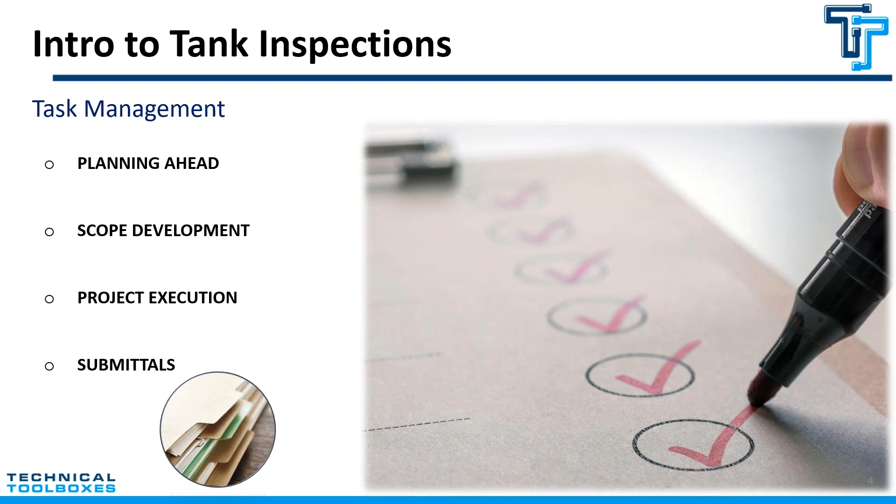Now, starting with pre-job preparation, the first thing I like to go over is communication, building a good line of communication. Project identification, knowing the type of tank and inspection that's going to be required. Information assembly, gathering your static data and historical documents. And equipment and manpower, outfitting each project with the proper tools and personnel to complete the project.

Okay, communication. One of the biggest things in this industry, as most of you know, is building relationships. Having a good line of communication, streamlining a good line of communication with your client or your customer during these projects is vital. If you run into a problem midway through a project, it's really important that you're constantly keeping your client up to date with something that might have gone wrong or something that might be going well.

They really want to be on your tail as much as possible because they want to get these tanks back into service as soon as they can. Knowing who your primary contact is, and also if there's any safety concerns, maybe there's some obstructions that you need to know about, and how fast do they want to get this job done. Obviously, you want to do these projects with good quality, but you do want to manage your expectations at the end of the day.

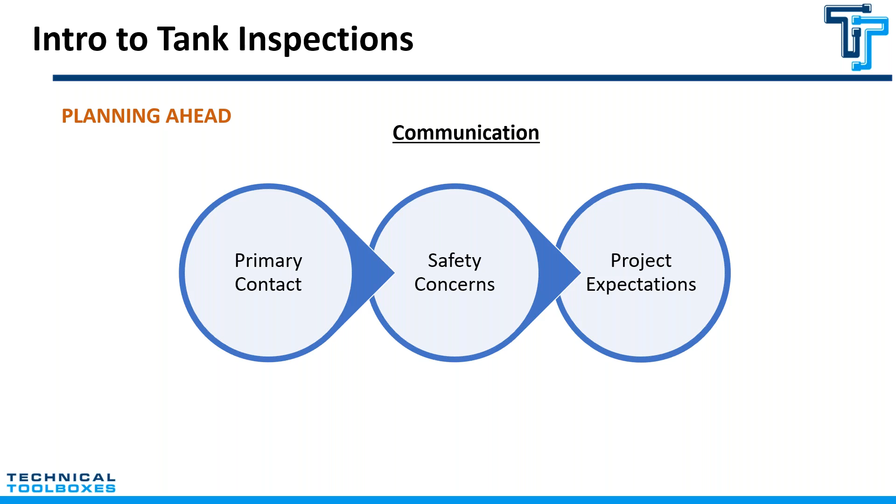Project identification. Obviously, you need to know what type of tank you're going to be inspecting, whether it's a vertical, horizontal tank, whether it's elevated or underground. These are really important features that you really have to acknowledge, especially when building your scope of work. The type of tank also changes the components that you will be looking at and evaluating during your inspection.

Inspection type, same thing. Knowing whether it's an internal out-of-service inspection or external in-service inspection. This changes obviously due to your interval of inspection, and this is something that the client will communicate with you before the job commences.

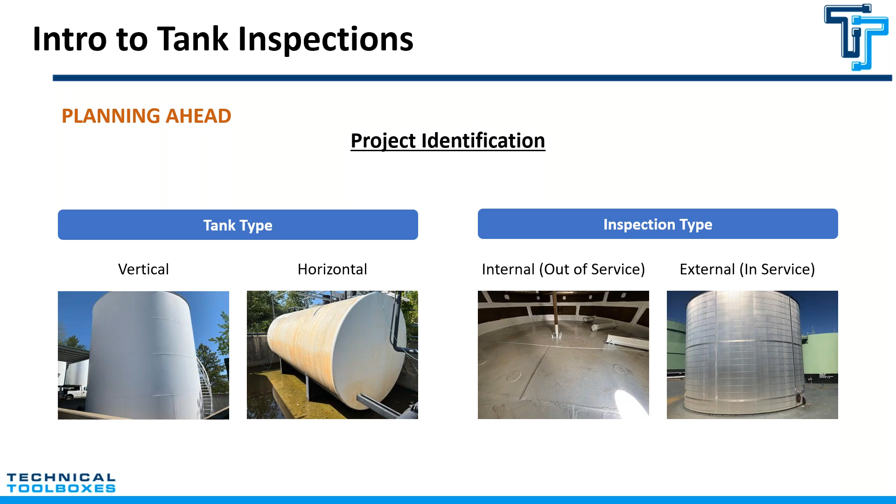Now, again, knowing whether it's an internal or external inspection is going to change which components you are inspecting. Obviously, you're going to want to look at as many things as you can while you're doing these inspections, but you will have limitations even on an out of service inspection. There's always going to be limitations. There's always going to be things that you can't inspect or evaluate. So having a good mindset on that is really important going forward.

Information assembly. Now, again, this goes along with communicating with your client. You really want to get as much information on these units as you can before you jump into them or before you start your project. Gathering as many historical documents, drawings, and previous inspection reports. These are going to help you build your report at the end.

It will also help you know if there's anything that you should keep an eye on while you're doing the inspection. Maybe there's a recommendation from a previous report where you need to monitor a certain area for deterioration. Again, things you have to be aware of before the inspection.

And it's also important while you're communicating this with your client to establish if he or she may know if there are any pre-existing problems. They're going to help you, and having that good line of communication is really going to help you solve a lot of problems preemptively during your inspection.

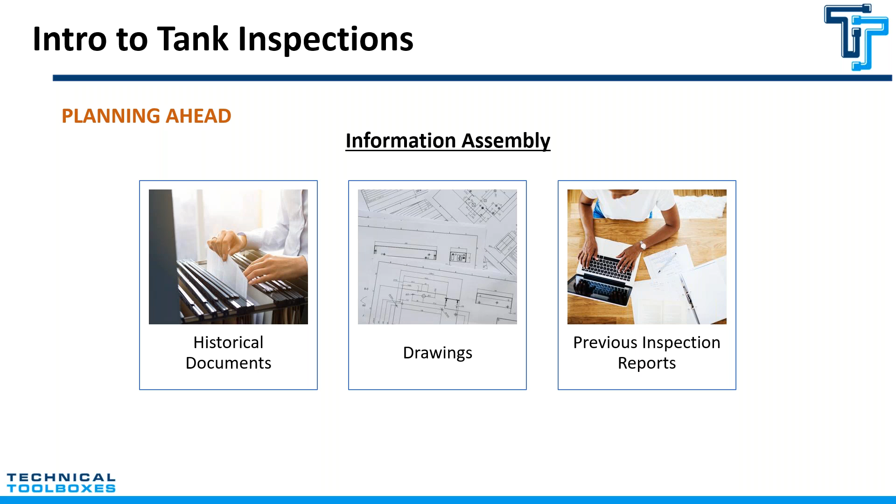Equipment and tools, right? Making sure you have the right tools. Obviously, it's going to change based on what you're doing in your inspection. I tend to like to overpack my units with as many tools and consumables as I possibly can, in case of a fire, as the expression goes. In case something goes wrong, I want to make sure that I have everything.

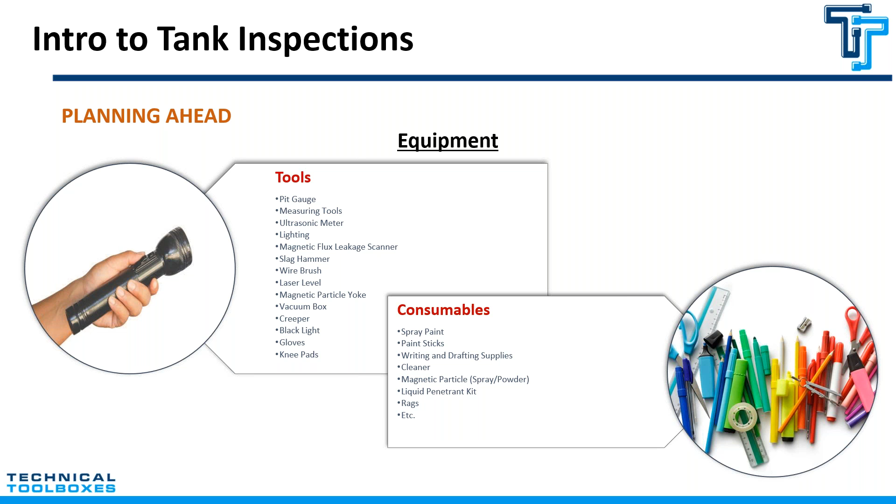I've given a list of some of my most common tools that I would pack my truck up with before heading out on a job. But again, it will change and vary based on your inspection type and your location. Obviously, if you're flying, you can't bring a lot of these things with you. So making sure that you have a good understanding of what you cannot bring is important. Whether it's going to all fit into your vehicle also plays a big factor.

The next thing we're going to talk about is manpower, team building. To me, this is one of the most important aspects of an inspection. Surrounding yourself with the right people is always an important task when it comes to any business, when it comes to any team. You need to make sure that they're experienced, they're qualified, certified, and well trained.

Just because you may be qualified for something doesn't mean that you are certified. There's a big distinction between those two things. You are going to be required to do certain inspections and certain tests that you will have to be certified for and qualified for. So making sure that your team is built upon those bricks will make it easier at the end of the day for you. Obviously, the experience is really important, and being well trained. And honestly, at the end of the day, just making sure you have the right people surrounding you always makes the difference.

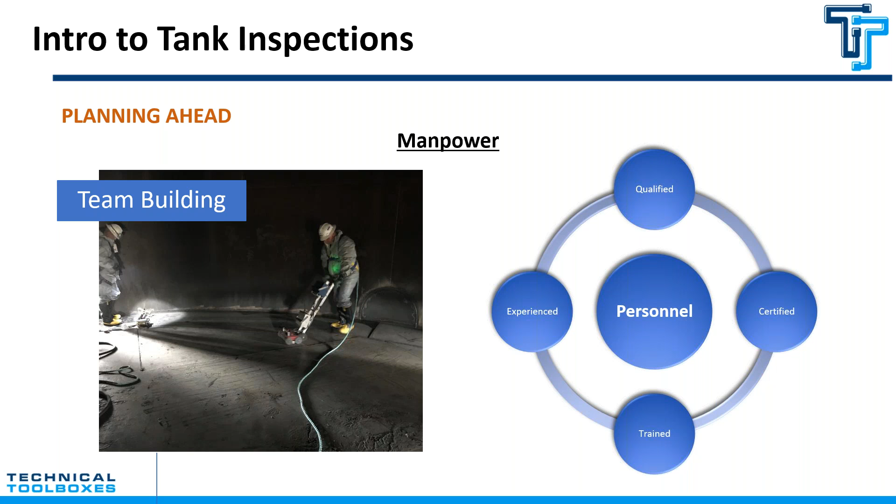Now, building your scope of work. For this case, we're going to talk about building a scope of work for an internal out of service inspection, which is, again, entering the tank and doing a full inspection on every component.

Component identification: identifying the components of the tank requiring inspection, right? This is knowing exactly the major components that you're going to be looking at. Each component will have different types of evaluations that will need to be performed for each one. The bottom and the floor, the shell, the appurtenances or manways and nozzles, any attachments to the tank, the roof, containment, and then miscellaneous. And I like to always include miscellaneous in there as a caveat in case something else comes up.

And this could include specifically the coating of the tank or maybe the cathodic protection, the access ways, the stairs. And honestly, these days, people are paying much closer attention to safety measures than they have been in previous years, which is great. So paying close attention to access ways, stairs, platforms, stuff like that is going to be important moving forward. You always want to be looking close at these things.

And if you do find something, it tends to be a positive and you end up saving the day for a lot of people. If someone were to come along on your job and not only get hurt or just notice a corroded stairway, it could cause issues for yourself and for your company. So I like to put a little emphasis on those areas when I'm doing my inspections.

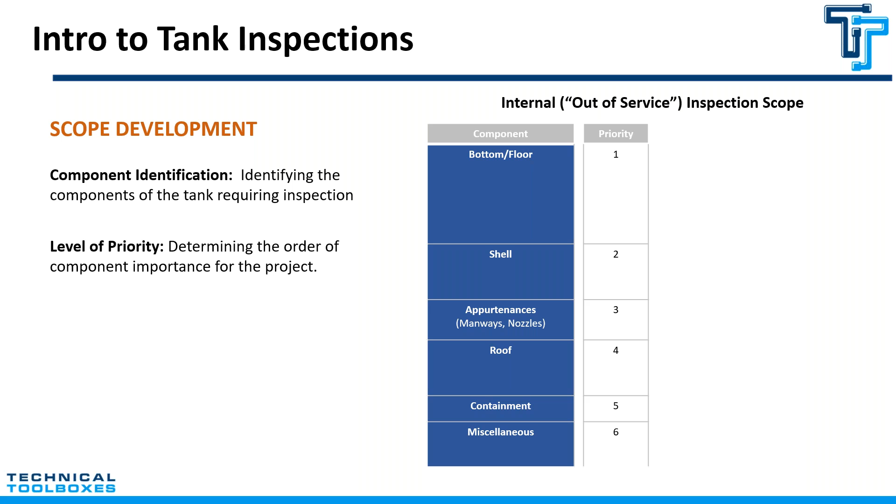Procedures. Now this is again, we're breaking down the procedures for each component, assigning the appropriate tasks, right? Every single component has a different type of procedure. And one of the biggest issues that I have found in this industry is that inspectors, even though they may have the certification, often don't have the experience. And so knowing what type of evaluations they need to perform is obviously very important. I always say that you can teach anybody how to do anything. It's a matter of giving them a list. It's putting a checklist together.

For the bottom and floor, for example, I like to make sure that you're doing a good visual inspection of all the plates, the welds, etc. Really, really taking a good look. The bottom and the floor tends to be the area where you're going to see the most deficiencies, the most deterioration. This is just a common thing. Going to the shell, right? Visual examination of the shell, same thing. Those lower sections of the shell are going to be really important to focus on.

And also, knowing which product the tank is in is also really important. So if this tank is experiencing product with a lower specific gravity like gas, you're going to often see corrosion in the vapor space, which will be up on the upper section of the shell, right? Or the underside of the roof. So it's important to kind of know your information before moving forward. And I'll get more into that as we get going here.

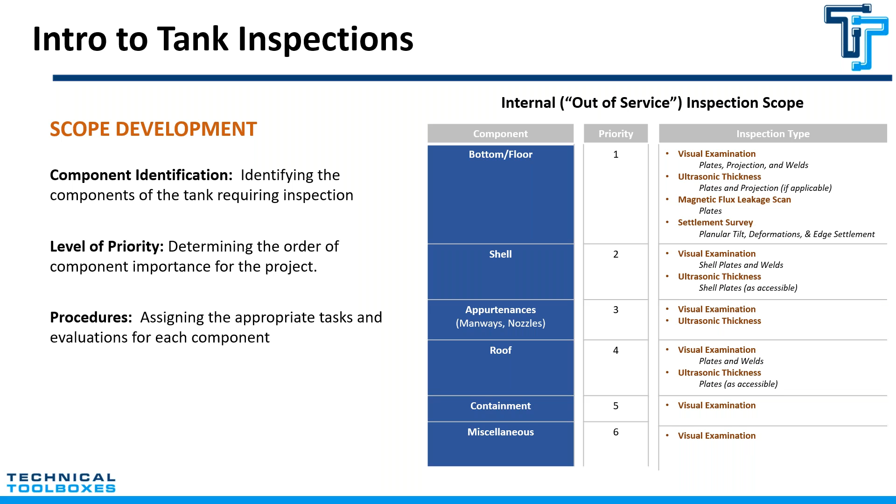Now, it is important to note that sometimes when developing a scope, your client or your customer contact may already have a scope that they want you to follow. I'd say 20% of the time this is pretty common, but most of the time they want you to develop the scope of work yourself. So knowing exactly what your components are and what types of inspections are required for each component is valuable. And again, there's plenty of people out there who have been doing this kind of stuff who will know. So there's endless resources when it comes to the type of inspections that need to be performed.

Moving on. Now, obviously, here we're talking about the actual field work, project execution, collecting the appropriate data. The more, the merrier, right? The more data you can collect, obviously, the more ground you're going to cover, the more you're going to make sure that you have at the end of the day. Capturing as much information as possible on the current condition of each component by the use of all these previously mentioned test procedures. Really, you want to just make sure, again, you're covering as much as you can, collecting that data, and then putting it into a report format. This will help your client. It will help future inspections. It will help really anybody who's going to be looking at that information in the long run.

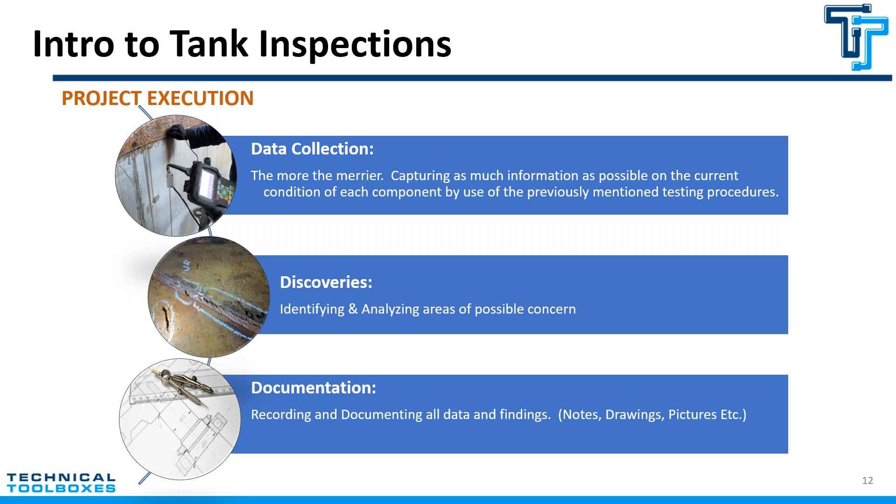Discoveries, right? This is where we're talking about our notable areas of concern, things that pop up during these inspections. This tends to be one of the most important things, obviously. You're out there looking and analyzing all your areas of concern, all your possible areas of corrosion, mechanical failure, so on and so forth. Documentation, recording and documenting all the data and findings, right? We're talking about pictures, drawings, etc.

Submittals, okay? Now we're getting into repairs and recommendations, detailing areas requiring repair, remediation, or monitoring, as well as providing the appropriate corrective action for each, right? This is usually the most important section of doing an inspection. Knowing what type of recommendations you need to present to your client and what kind of repairs each recommendation will require. Sometimes it's going to be monitoring a certain area over a long period of time, but again, having a good grasp on your recommendations and what is important for them to repair is important.

Again, I like to break everything down into a priority level. I like to say whether or not it needs to be repaired now, it can be monitored over a period of time, or it's not an area of concern. Again, noting everything is still important. I like to make sure that we're in the business of covering our behinds. We need to make sure that we're looking at every single thing and we're recording everything.

It's the old adage about even if you verbally tell your client that you have seen something, you always want to make sure that you follow up with an email or something written. I like to put it in my report later on to say, here are my recommendations. These are considerations that I have brought to the attention of my client. Again, it's all about making sure that you're covering all your bases at the end of the day.

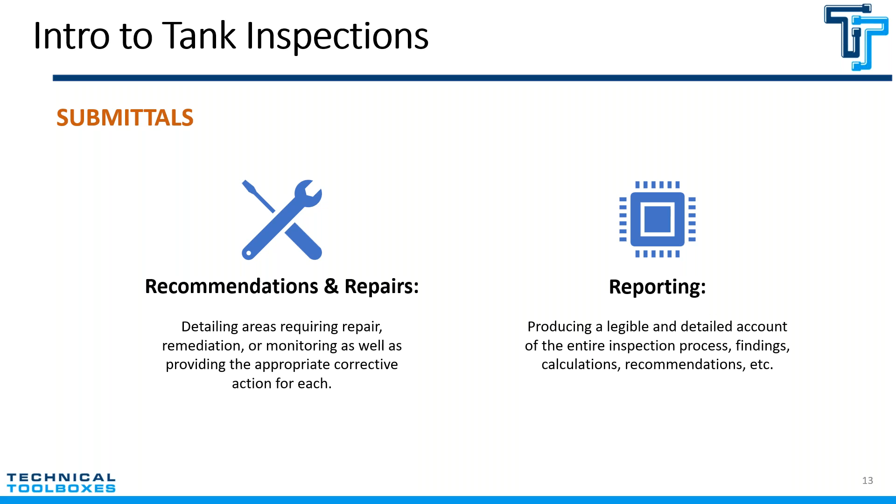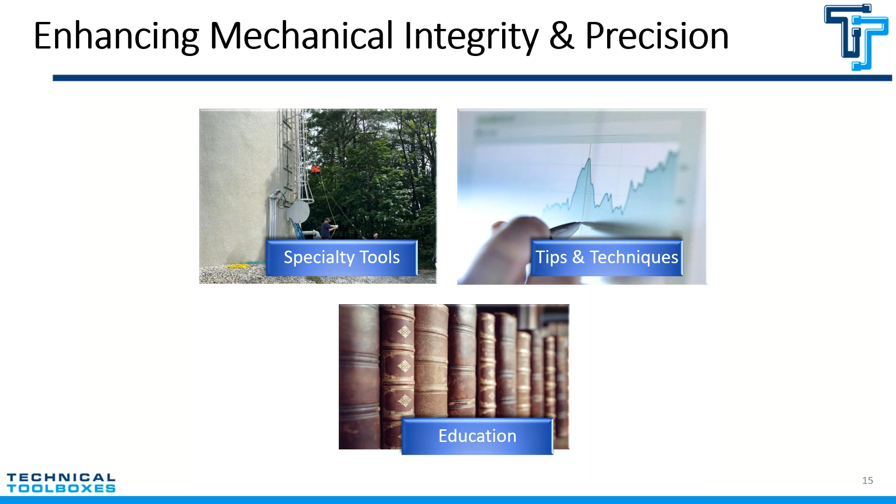All right, we're moving on to enhancing mechanical integrity and precision, right? This is where I'm going to talk about some tips and tools to performing a good solid inspection. For me, obviously, I like to break it down into tools, tips and techniques, and education. When we're talking about specialty tools, you can kind of go in multiple ways. Knowing which type of tools to use while you're doing your inspection is kind of up for grabs. Obviously, getting the more advanced technology out there is great and can be very valuable, but also making sure that you have a good grasp on the basic equipment is important too. And obviously, we're all trying to get our hands on the newest and best.

And so, using a phased array unit, honestly, this has been a new thing for me in the last few years. I found that you can find flaws on a tank bottom faster and more accurately with straight beam inspections. Phased array units are typically only used for angle beam weld inspections, but I took a class on how to do flaw detection with straight beam with phased array, and it's changed my world as far as looking for flaws on a tank bottom, tank shell, whatever it may be.

I've been able to find areas of concern that I never thought I would be able to find before, and everything is so much faster now, and honestly it's changed the game for me. So I couldn't suggest it more to any of you new inspectors or current inspectors out there: get a flaw detection straight beam inspection certification. It's totally worth it.

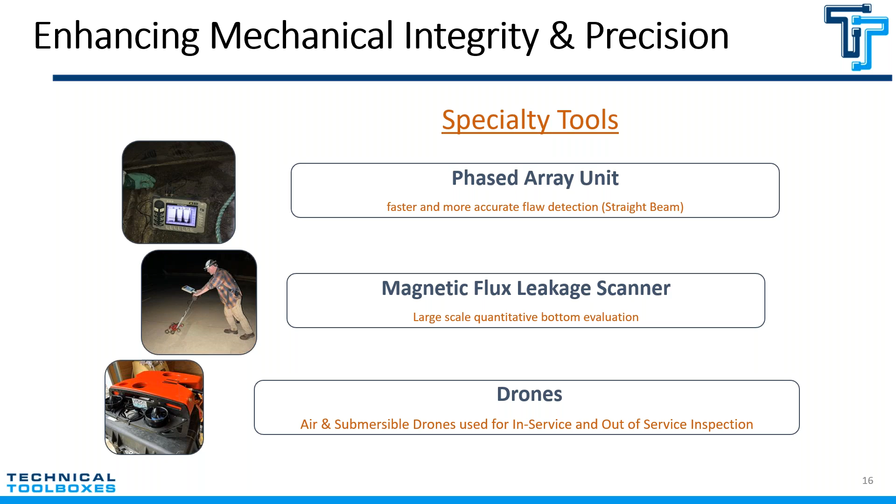Again, I still am more privy to doing an inspection when I'm hands-on, but again, new tools, new opportunities. It's great to keep going in a forward direction. Probably going to take all of our jobs one day. Hopefully not.

Tips and techniques. Again, I'm going to go through some tips and techniques for you. Doing mapping, which is just rollout drawings, is super important during your inspections. I like to do them no matter what, even if they're useless, even if I'm not providing myself with anything. Honestly, I'm just sketching out what I'm seeing and making sure that I'm covering everything.

And when you're asked to do repair plans at the end of a project, it's super helpful to a welder or a welding crew if they need to go find something and you've mapped it out completely. Very beneficial. And again, just being able to have that in your own notes and your reports can be a super valuable tool.

Data collection. Yeah, sorry, data collection. And this is in regards to Technical Toolboxes itself, being able to collect your data while you're in the field. Again, I like to put it all on paper. Technical Toolboxes is now finding a way to enhance that experience. They've built a program now where you can put your information while you're in the field into a collection tool and upload that into their program. This will help you do calculations and really help you with your reporting at the end of the day.

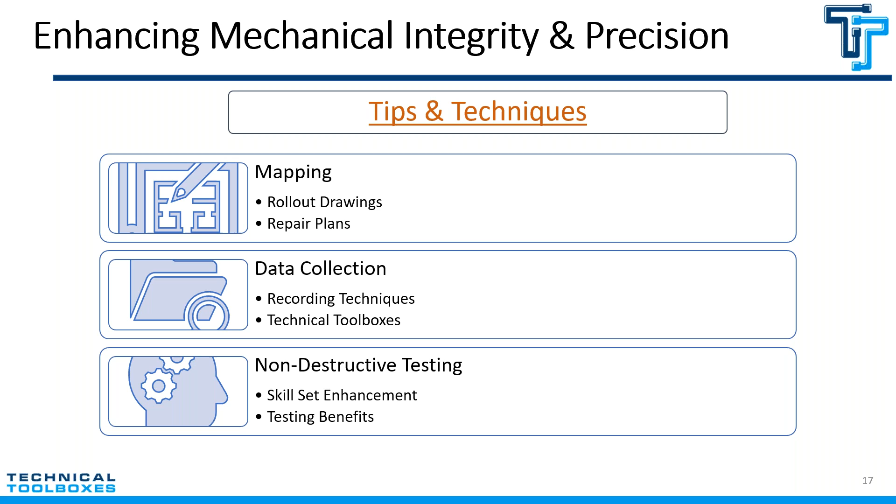Obviously, non-destructive testing, getting your NDT skills up. This is huge. I know that for me, when I started actually managing projects myself, having that NDT background was super beneficial to me. Having been in the trenches, doing every aspect of these inspections really enhanced my skills, and I'm very, very thankful for it to this day. You're also willing to do a lot of things that you normally wouldn't be willing to do, so I always enjoy that. Yeah, moving on.

And more tips and techniques here. Engineering controls, right? I use this as a way to really set yourself up for success. Recommending protective coatings. For me, over the years, I have dealt with so many units where companies are deciding that they don't want to spend the money to put protective coatings inside of their tanks. To me, it's like the best insurance policy. At the end of the day, you would be stepping over dollar bills to pick up pennies if you're not putting these protective coatings in.

Some products it's not necessary for, because those products tend to not be corrosive, but most products, especially in the oil and gas industry, are very corrosive and bad for steel. And you will be amazed at how quickly steel will start to deteriorate in a small period of time.

On many occasions, I have seen a brand new tank floor be installed and they decide not to put a protective coating, an epoxy coating, on the inside. 10 years later, they open up that tank and it is riddled with flaws. Doesn't take much. So I'm always telling people to recommend coating tank bottoms, coating the inside, do as much coating as they can, always keeping up with it. Even if it is coated in the first place, just make sure you keep up with it. Super, super beneficial. Preventative measures.

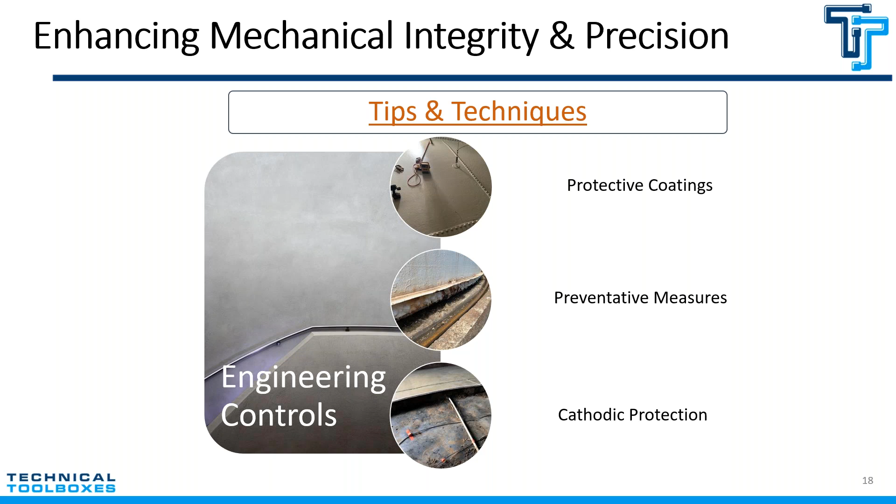Cathodic protection. It's becoming more and more popular as time goes on. There are still a lot of variables that come into play when it comes to cathodic protection. It's not a perfect science. People will tell you that it is, but it still needs work. And at the end of the day, it still is a useful tool when it's working. So again, if you have a tank that has cathodic protection and an internal coating, in a perfect world, that bad boy should be good forever. So really important measures to be aware of when you're doing these inspections.

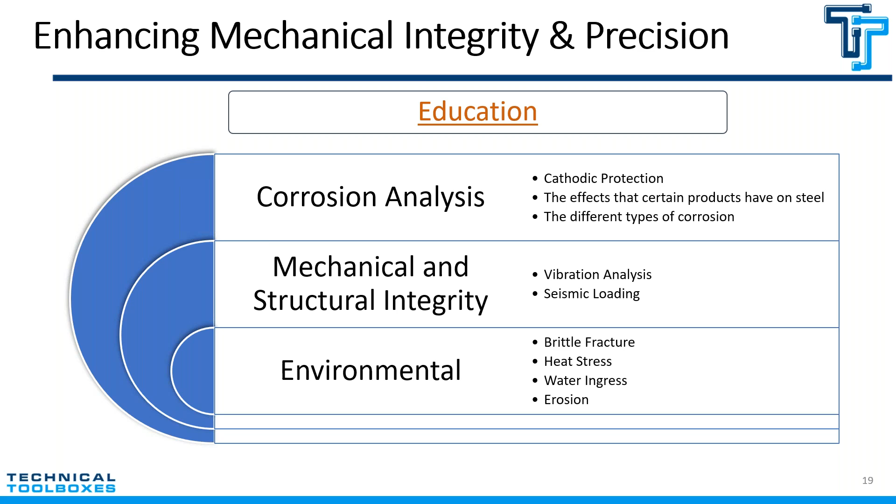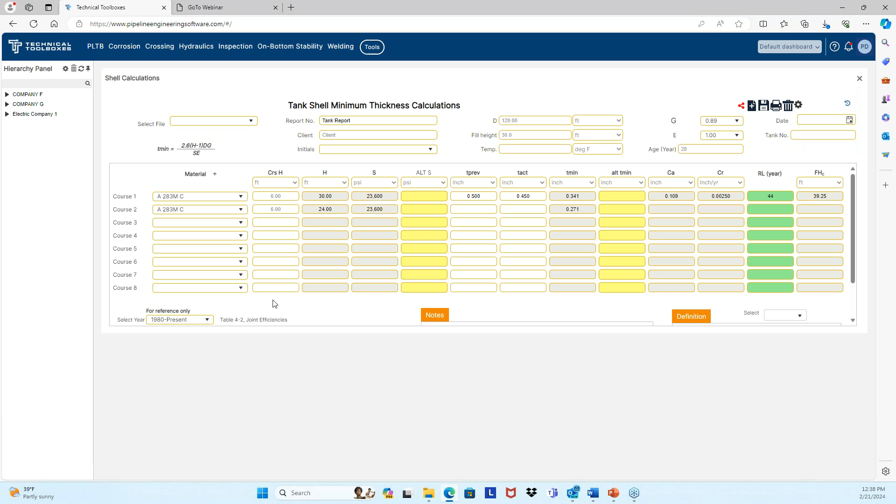Once you're all done with this, you can actually print them out into a Word document or a PDF where it presents it in a really nice way. I could go through the entire toolbox with you, but it varies. There's a lot of great tools in here that are really helpful, and I use them every single day. So moving back to the PowerPoint here.

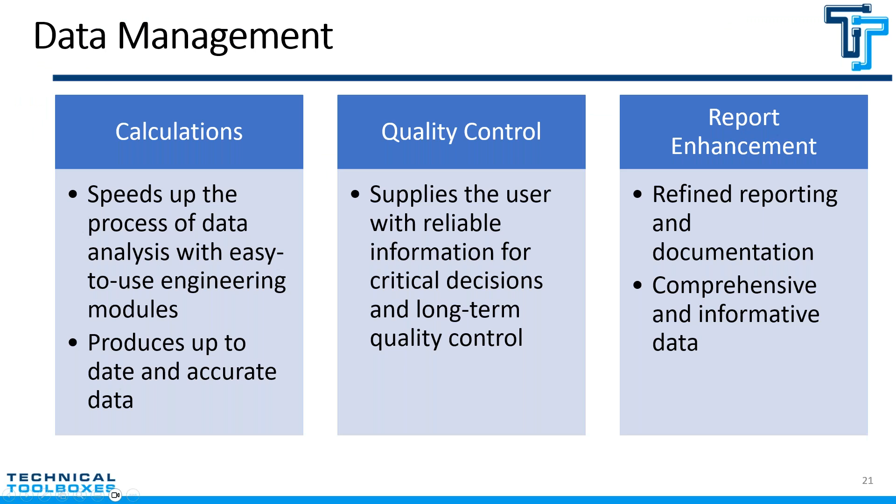That was the live demo. Okay, so some of my challenges and case studies. Here are some real life challenges that I've faced in the industry. Just things and obstacles that I've come across that are probably going to happen to you at some point, or have happened to you at some point, and this is how I dealt with them.

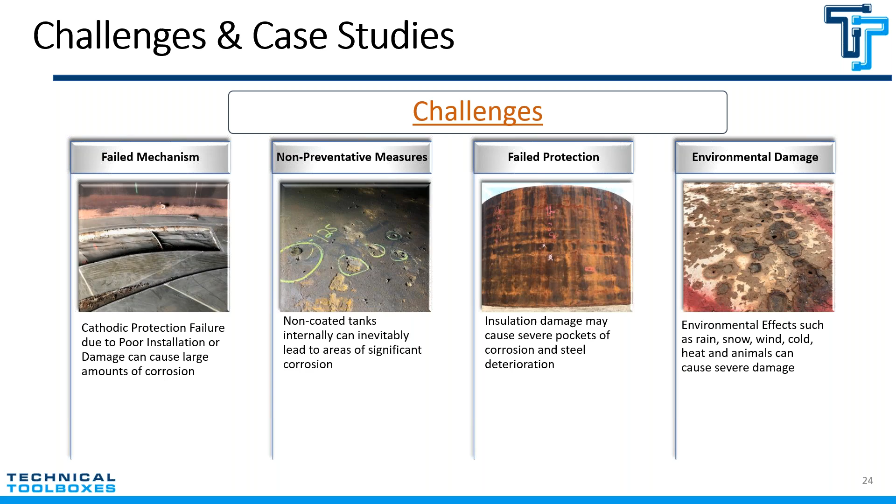We're talking about failed mechanisms like cathodic protection, non-preventative measures, non-coated tanks, stuff we already discussed, failed protection. This is insulation damage and environmental damage. And this was an event from certain animals having an effect on the roof of a tank. So we'll start with the cathodic protection. Each one of these is a different project that I've experienced.

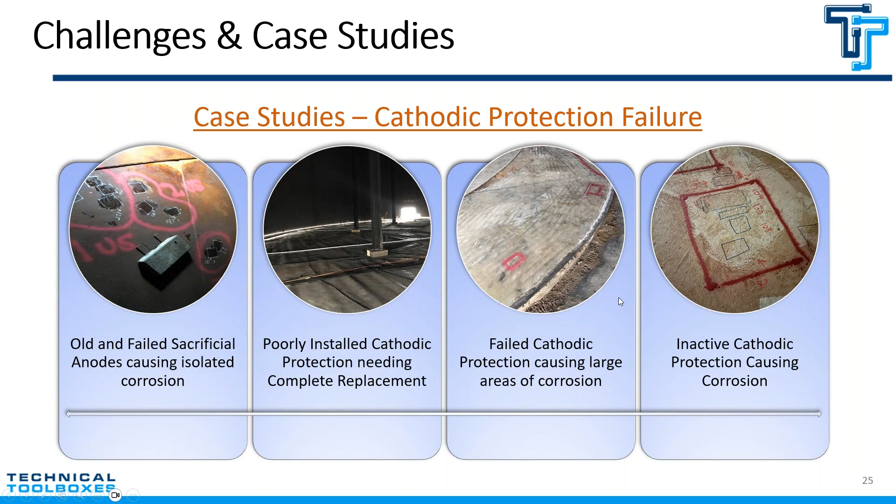The next case on here is another case of inactive cathodic protection. I did an inspection on a tank where I found a significant amount of corrosion on a tank that was said to have cathodic protection. In this case, the cathodic protection wasn't working and was in turn having a negative effect on the steel itself. And not only was it affecting this tank, but it was also affecting the tank adjacent to it. It was like a negative charge. So very bad situation there. Again, just things that you need to know about.

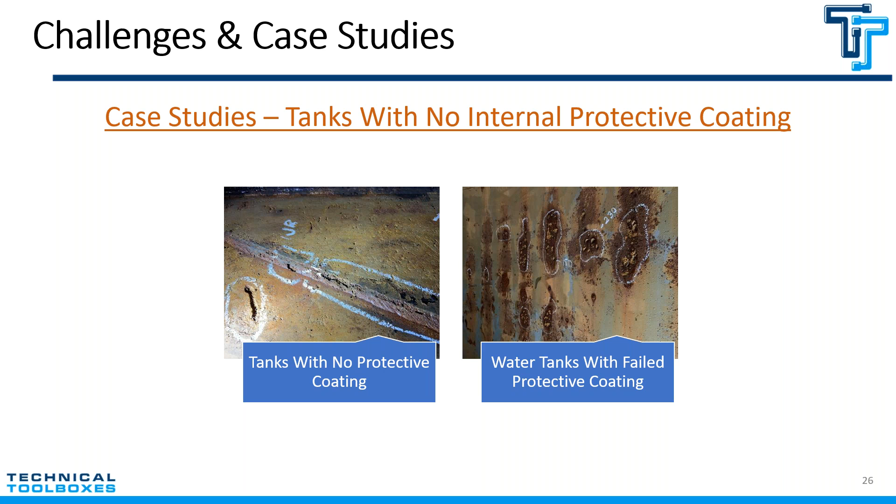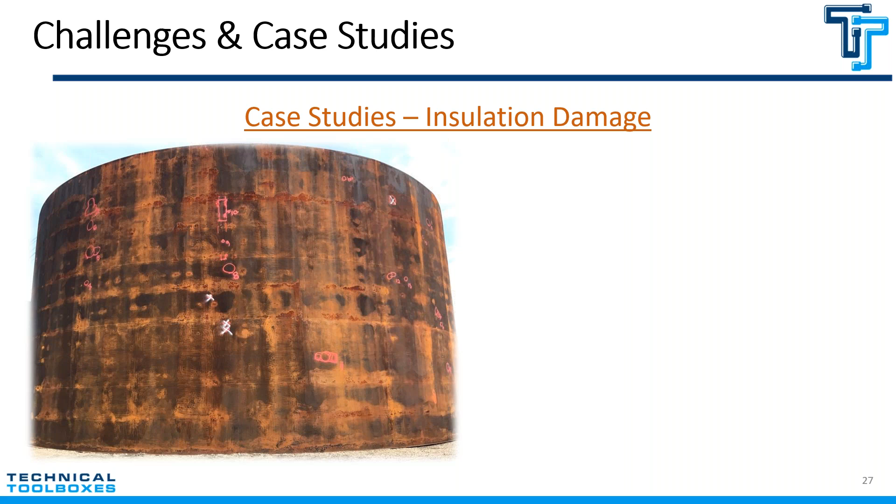Another case study, insulation damage. Old insulation is gonna cause pockets of corrosion. It's inevitable. In this photo in particular, they had to remove the entire insulation jacket, because they were finding holes on the inside of the tank that were caused by external water pockets. Super bad.

That was quite the construction that we had to take over. And again, it was due to poor maintenance on the insulation jacket. Just was a lot of damage. It was sitting on the ocean, so obviously the water is going to get into it, and it's salt water, and now we're talking about a totally different type of corrosion. And again, it just ate through this tank shell, and we eventually had to do a lot of repairs and replacements on this shell.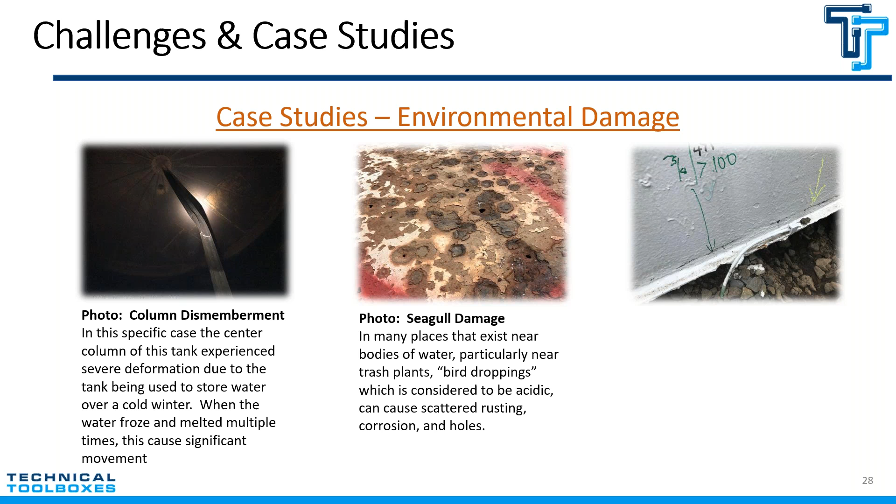So again, kind of a unique situation. Making sure it was coated, they ended up putting owls, or fake owls, up on top of the tank and such to prevent it from happening ever again. Who knows if it worked.

Deterioration of the floor projection plate. I like to use the floor projection plate, which is the bottom of the tank that sticks out externally on the tank, as a measure to determine if there's any water getting underneath the tank, and if I'm going to see any corrosion. If I'm doing my inspection on the inside, you want to be able to focus on areas of concern.

If you start seeing corrosion on a floor projection plate, as seen in this picture, there's a good chance that water is getting underneath that tank floor and doing some pretty nasty damage. So again, it's an area that you can use to help assess another spot in the tank. Being able to notice things like this is very important.

One of the things that my grandfather always used to talk about with the industry was, I asked him one day, I said, what makes you love this industry so much? And he told me the reason he likes doing it is because he gets to play detective every day. He gets to go out there, almost like a Sherlock Holmes, and solve problems and come up with solutions and really track down evidence and stuff like that.

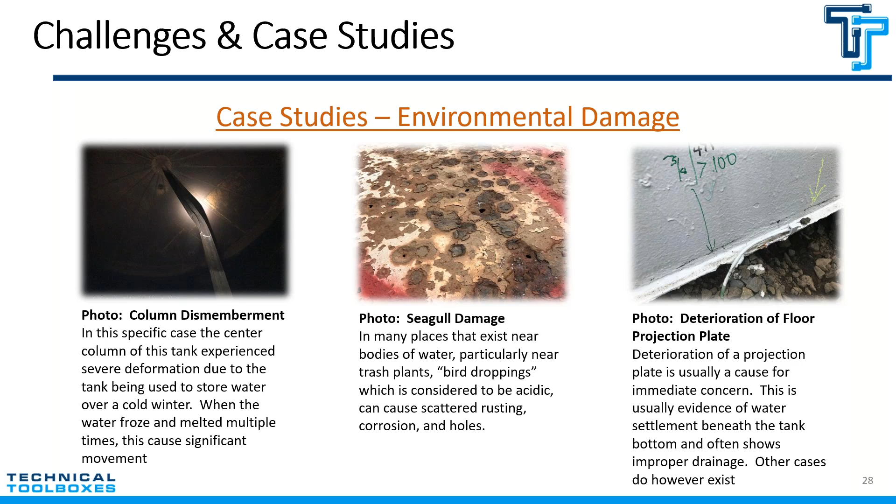So we're going to get into the API inspection data collection tool. I'm going to turn this over to PK and Kesley and let you guys get into this. This is a new tool for their technical toolbox and a great new tool. So I'll let them get into this and explain it.

All right. Thanks, Corey. Yeah, so Technical Toolboxes developed this tool. It is currently under development, so very soon it will be out. This helps in getting the data captured while you are in the field. So you can take the thickness measurement readings and all other measurements related to your tank, and then you would add it here in this application while you are on site. That way you don't have to enter it on paper or anything.

You can just directly enter it here, and then later on when you are connected to the internet, you would be able to push that data into our software. That way there is no re-entry of the same data into a different application, and you would be able to update that later on when you go back to the field. That can again be updated, and it will go directly into the program. So it is a time-saving activity. We are not trying to re-enter the data again and again. It's just a one-time activity, and then use it freely.

Now this can be used on your laptops or on your tablets as well, so that capability would be there, so you would be able to enter that data. And yeah, in short, this is what it is all about.